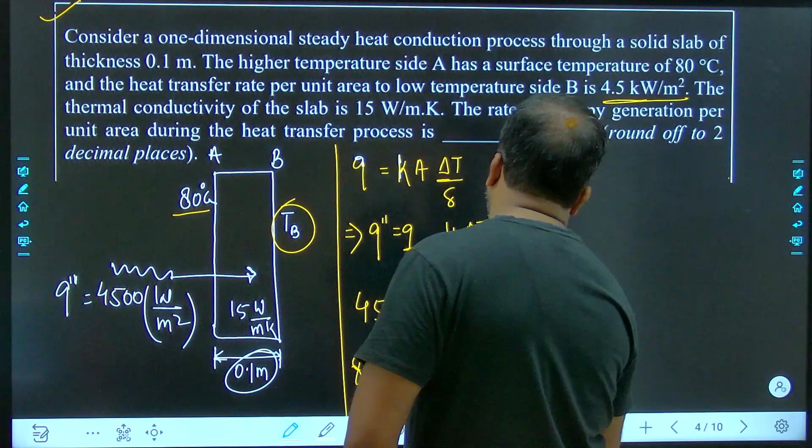So 4500 equals delta T, 80 minus TB, upon del, which is 0.1, and this K will come down, 15. So I can write 80 minus TB is 4500 into 0.1 by 15. So it will be cancelled and it will come out to be as 300, and 300 into 0.1 is 30, means 80 minus TB is 30, which means TB is 50 degrees Celsius. I hope it is clear.

Now, S dot generation is nothing but delta S dot of the wall. And how much is this? Q by TA. It is leaving TA. If you talk only about the slab, it is leaving this surface A, right? It is reaching the surface B. So plus Q by TB. So S dot generation shall be, Q can be taken out as common, 4500, minus 1 upon 353 plus 1 upon 323. So something will come. How much is that?

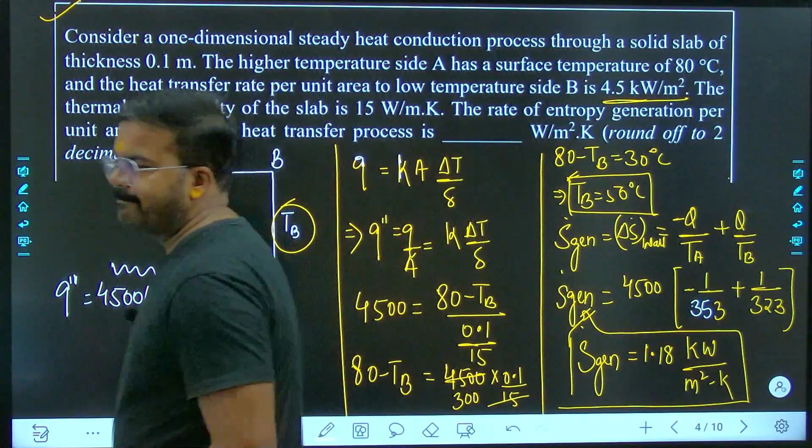Let us see. 1.18 kilowatt per meter squared Kelvin. Sir, kilowatt per meter square is not the unit, then why is it coming in kilowatt per meter square? See, bacha, this is coming in kilowatt per meter square because the heat involved here is not heat transfer rate actually. It is heat flux. That is why. I hope it is done. Kindly take a screenshot, then we shall be moving forward. Okay? Fine. Next up.

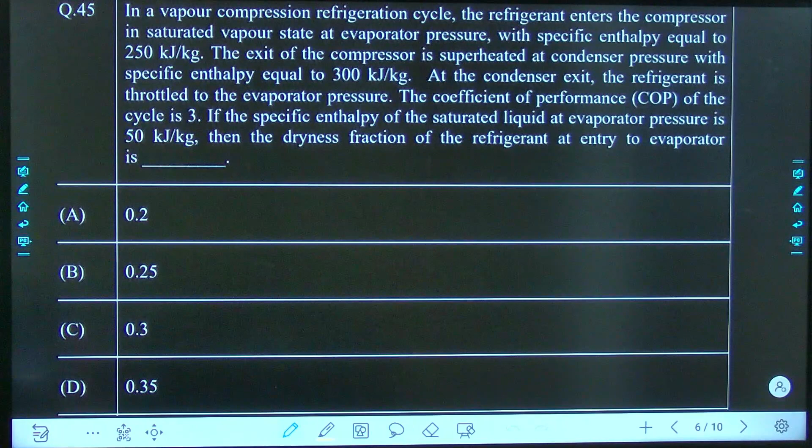Next, this question is a good one. Please try it out, then we shall be moving forward. Okay, so let's move forward. Try this out. Now you have this. All right.

And the enthalpies are mentioned over here. For example, over here, the enthalpy is given to be as 300 kilojoule per kg. Over here, it is given to be as 250 kilojoule per kg. Nothing is mentioned here. Over here, HF is given 50. Now we know that COP can be written as refrigeration effect upon work input: H1 minus H4 upon H2 minus H1. So COP is 3, 250 minus H4 over 300 minus 250, so 50 into 3 is 150, H4 shall be 100.

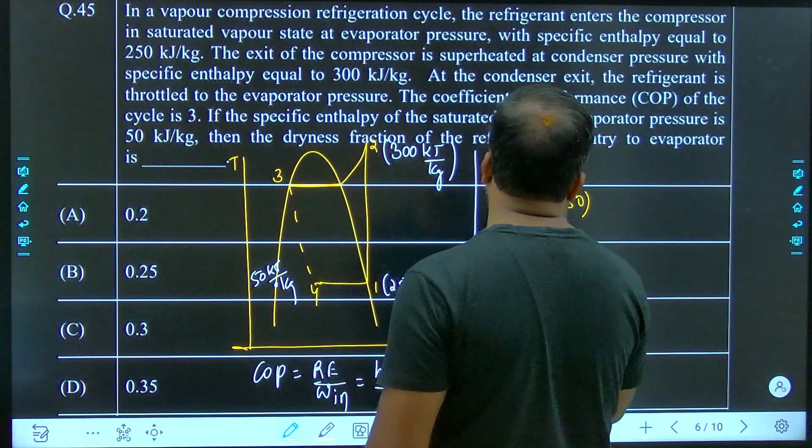Right? Now, this value of H4 can be written as HF plus X times Hg minus HF. Am I right? H4 is HF 50 plus X times 250 minus 50.

Am I right? Now what we are getting? X equals to 100 minus 50 upon this shall be 250 minus 50. That is your X. Now the value of X coming out to be as 1 by 4. So this 1 by 4 shall be 0.25.

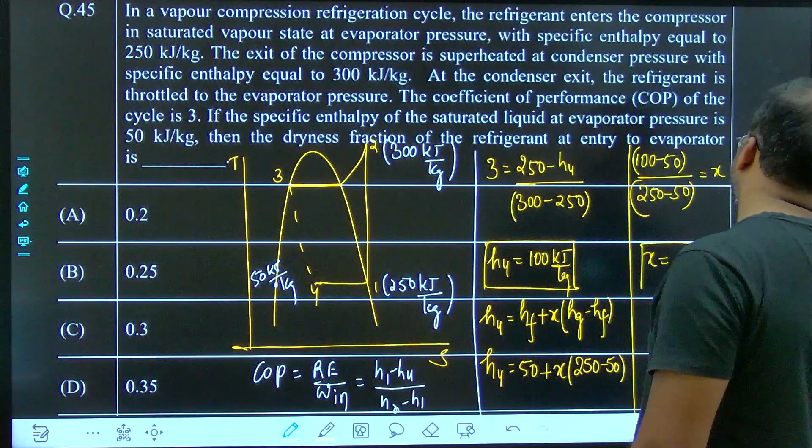X shall be 0.25. That is the answer. I hope you have understood this, right? X value is coming out to be as 0.25. The value of X is 0.25, of course. Am I clear? So kindly just copy down or take a screenshot simply. No need to copy down this lengthy part. Take a screenshot, then we shall move forward.

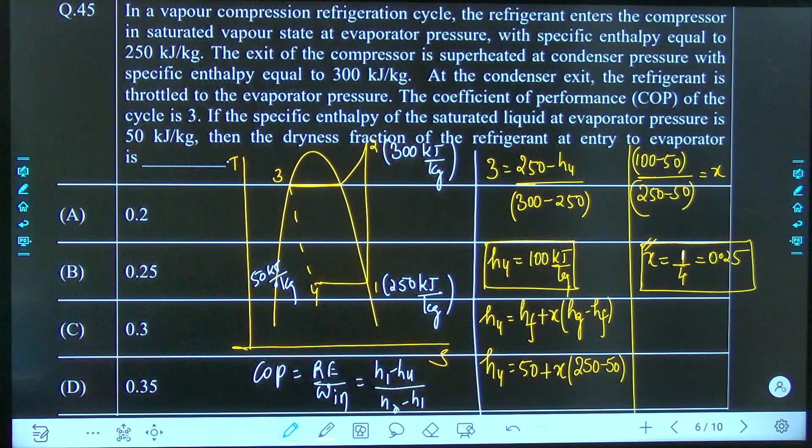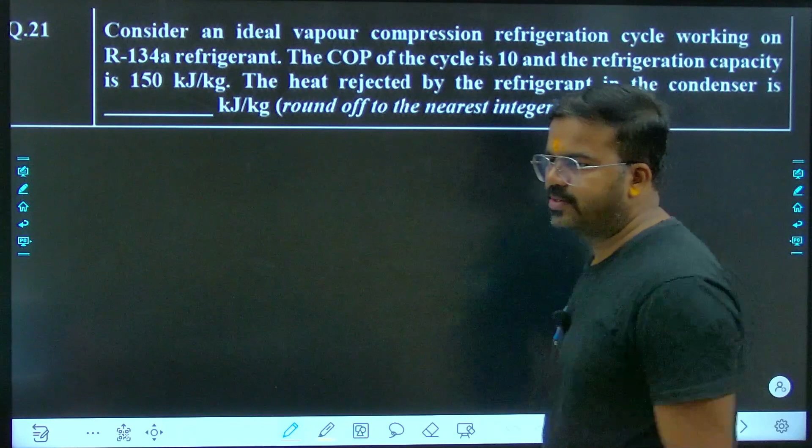Okay, I think ample amount of time was given. Next, this question is damn easy. Try it out. It's a very good question. Try it out, please.

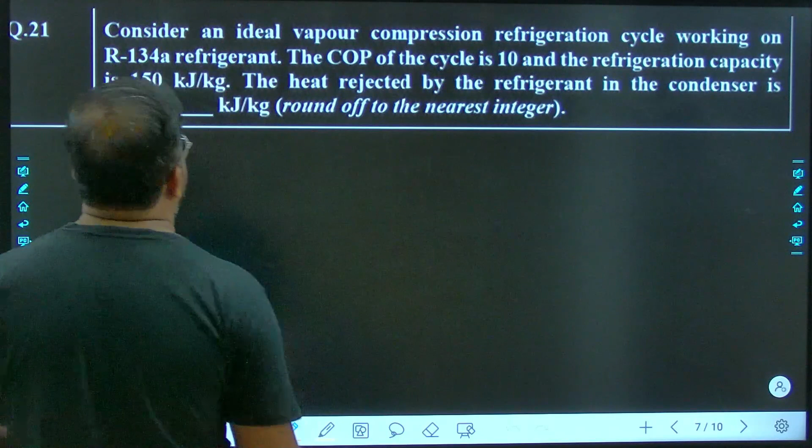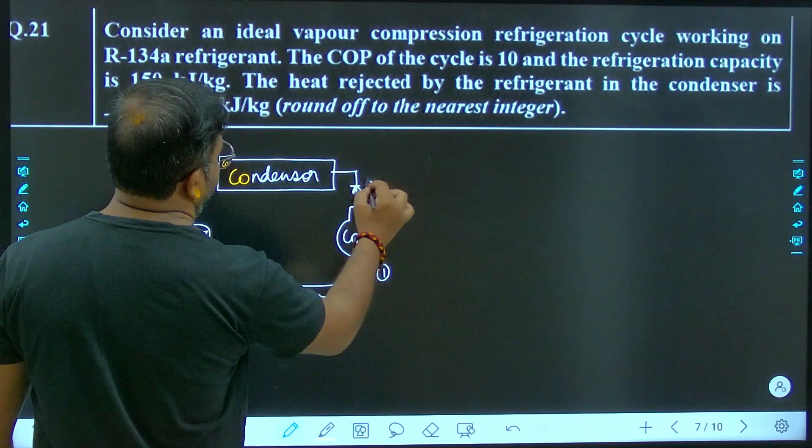Let's see the next part. This is the condenser, right? That is your compression. This is the evaporator. This one is throttle valve. Okay, 1, 2, 3, 4.

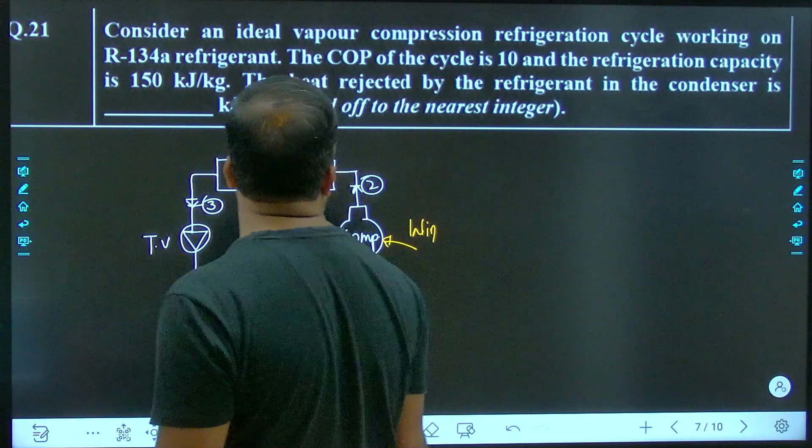So this is taking up heat which is equal to 150 kilojoule per kg. This one is some work input going in, and this is the condenser, right? So some heat will be lost from the condenser. So now if you apply the energy balance, it will be energy coming in equals total energy out.

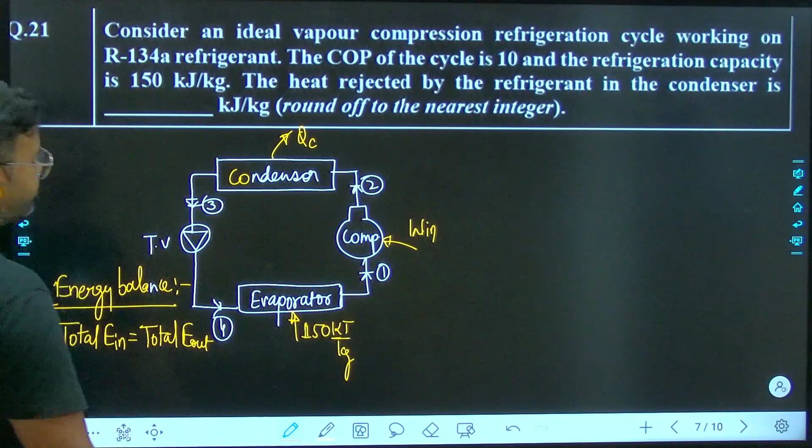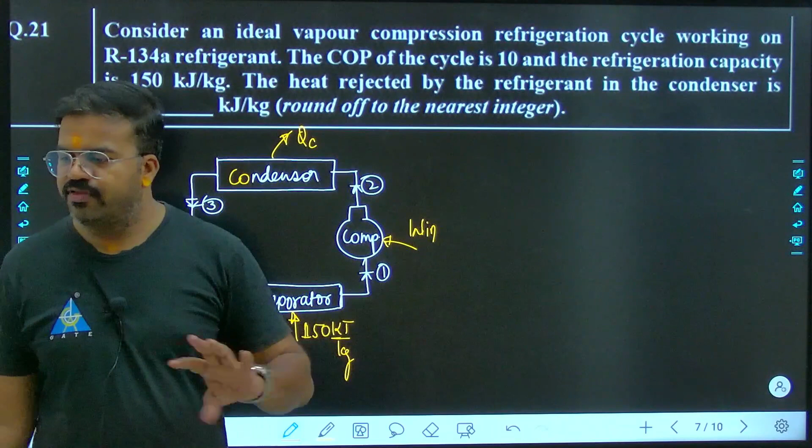So now how much energy in is coming? 150 plus W in will be equal to QC. So if somehow we are able to find out this W in, all will be done. So how to find it out? Let's see, through the help of COP we can do that. What is COP? COP is refrigeration effect upon work input.

So COP is 10, not 3, my mistake, 10. 150 over W in. W in shall be 150 over 10, 15 kilojoule per kilogram. Am I right? So now QC shall be 150 plus 15, that is 165 kilojoule per kilogram. That is our QC.

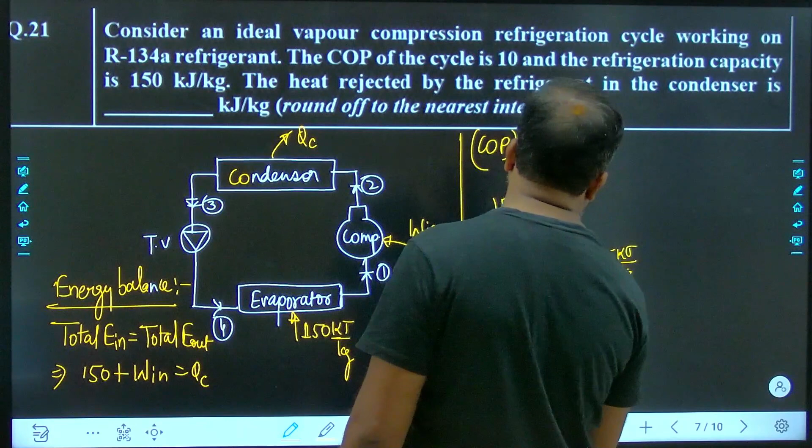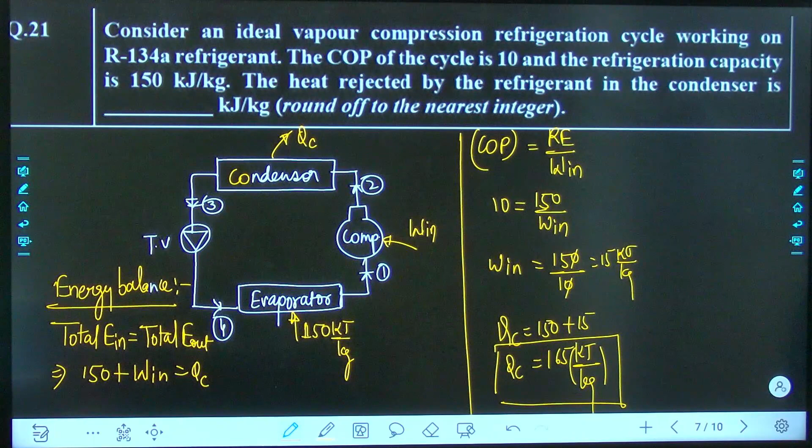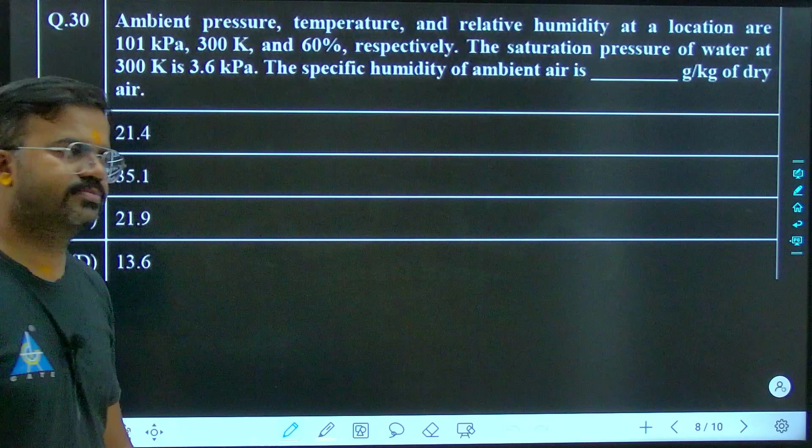Simple, kindly take a screenshot, then we shall move forward. Take a screenshot please. Okay, next question, try this question out. It is from psychrometry, right? That is ambient air and all. Try this out, then we shall move forward.

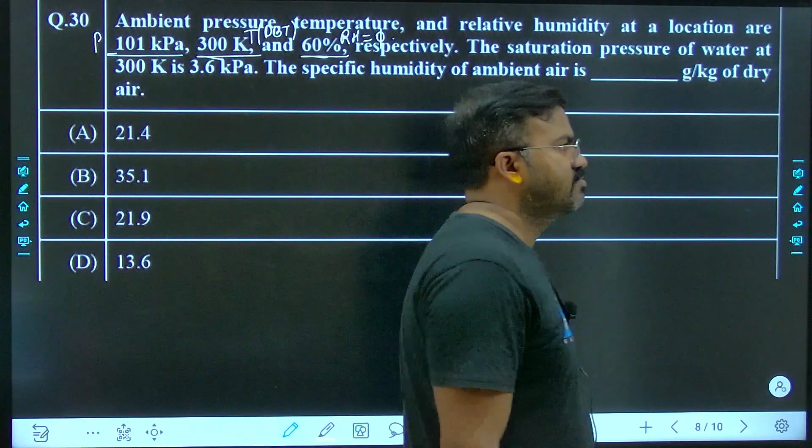So what is this phi? Let me give you a context as to what is the meaning of phi, what is the significance of phi. Whenever cricket matches are happening, whenever there is a cricket match going on, they always announce in terms of moisture content or humidity, and that is announced in terms of percentage. So that percentage is 60%.

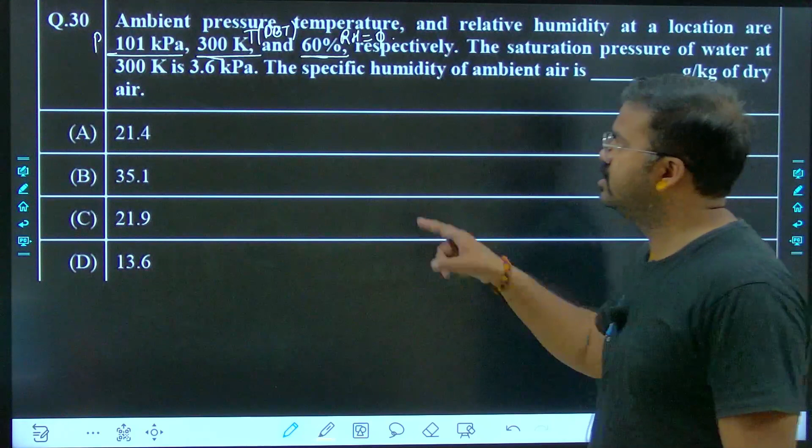So RH is 60%, that is 0.6, PV by PVS. Am I right? It is your PV upon PVS. And PVS is this. It is given now, saturation pressure at this point. So PV equals to 0.6 into PVS, that is 3.6, which means 2.16 kilopascal.

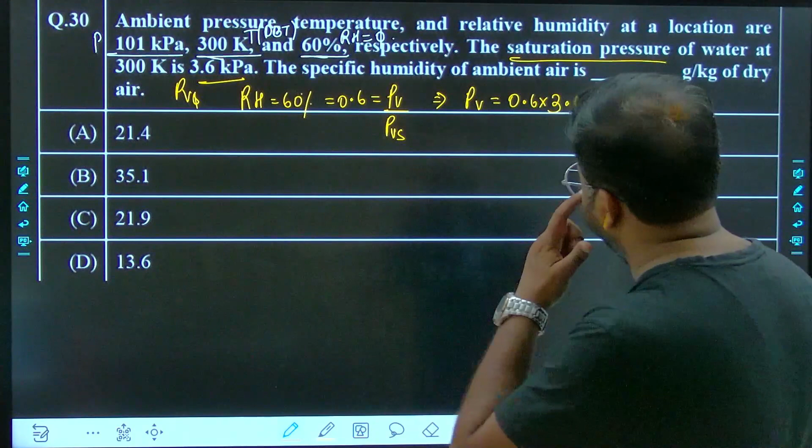This much PV is coming. Now, omega shall be 0.622 PV over P minus PV. Am I right? Now, omega will be 0.622, PV is 2.16 over 101 minus 2.16. So now omega will come. Let's see how much it is coming out to be. We'll have to calculate.

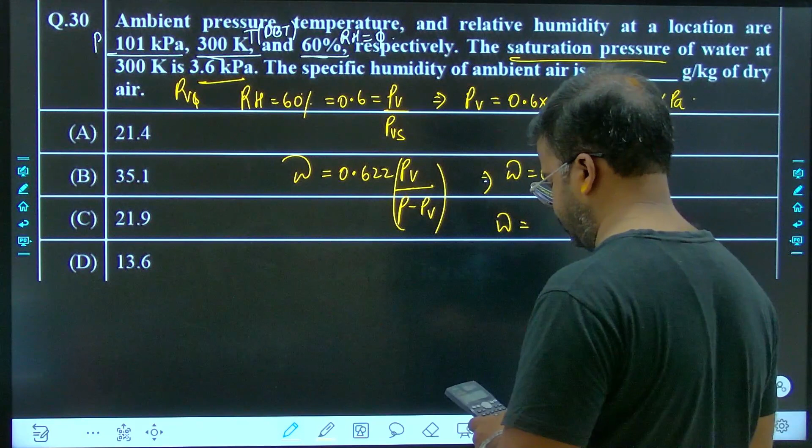0.01359 kilogram per kilogram dry air. But it is asking gram per. So omega shall be 0.01359 into 10 to the power 3 grams per kilogram dry air. So omega shall be 13.6 grams per kilogram dry air. All right.

This is the value of omega. I hope it is clear. I want you guys to please take a screenshot. Then we shall be moving forward. Kindly take a screenshot and then we shall be moving forward. Do it, please.

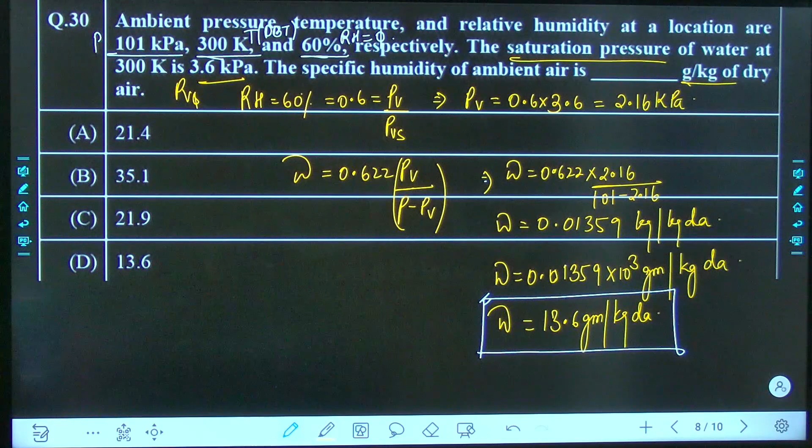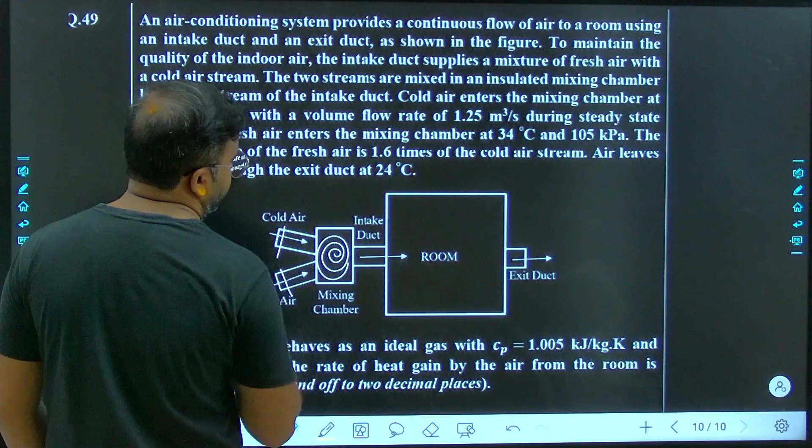Okay, so now please understand with the help of diagram what is happening. Some cold air is coming, some fresh air is coming, they are mixing up here, and after mixing they are being sent to the room, and from the room they are exiting out at 24 degrees Celsius.

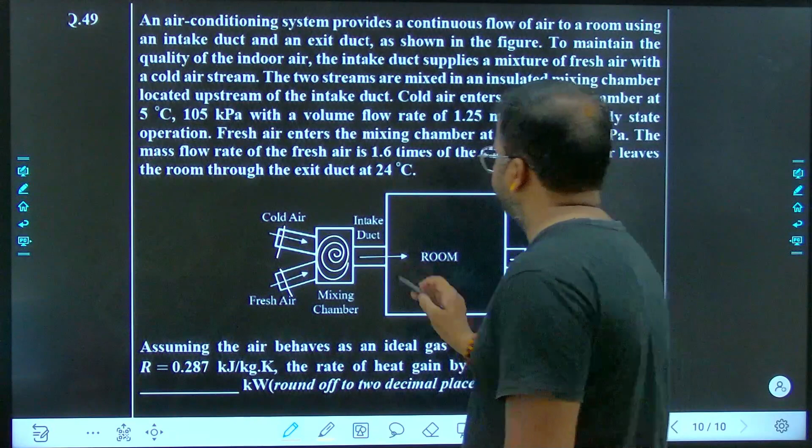We don't know the temperature over here, so let us keep it as T. 105 kilopascal pressure cold air is coming at 5 degrees Celsius temperature and volume flow rate of 1.25.

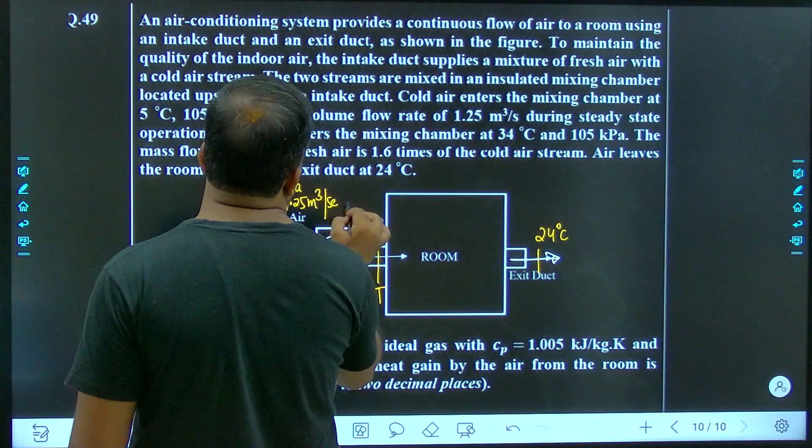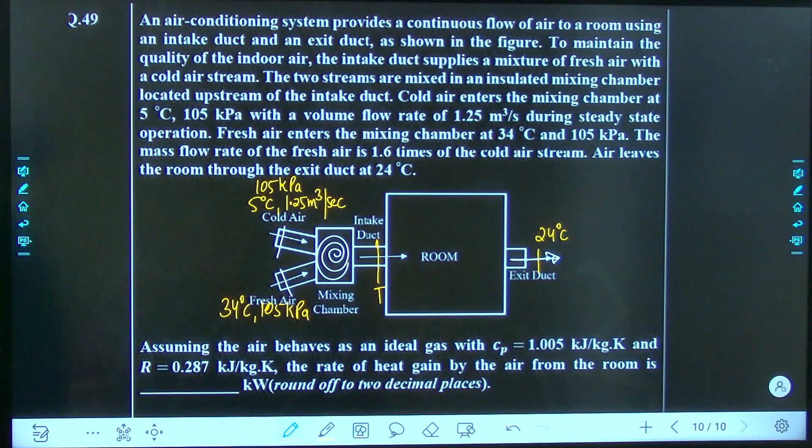Over here, fresh air is coming at 34 degrees Celsius, at a pressure of 105 only. Why? Because if same pressure is maintained, then only mixing without loss can occur. If you want to take out mixing without losses, this has to be done.

Next, this is 1.6 times the mass flow rate of earlier, meter cube per second. Am I right?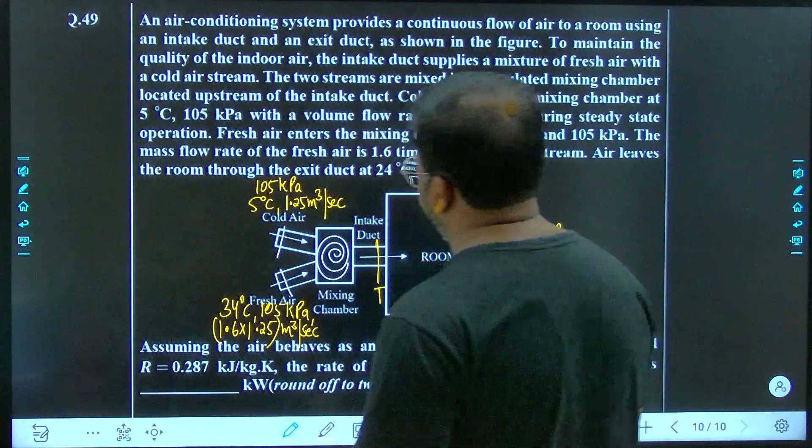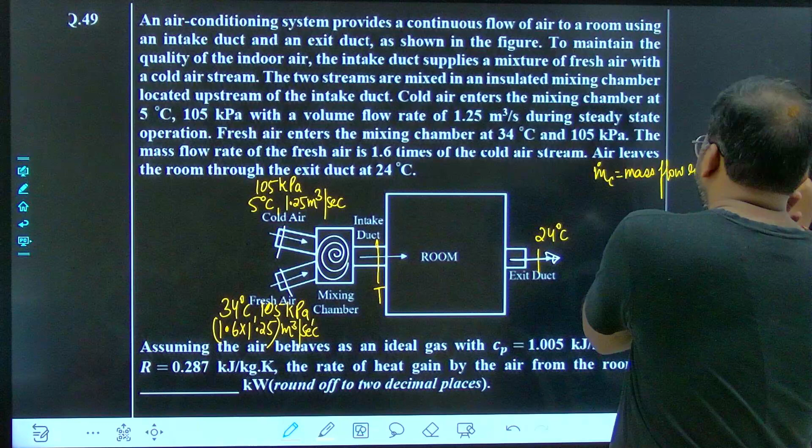Okay, now mass flow rate, m dot c, mass flow rate in of cold air. If we talk about mass flow rate of cold air, P V dot upon RT. How much is P? 101 kilopascal.

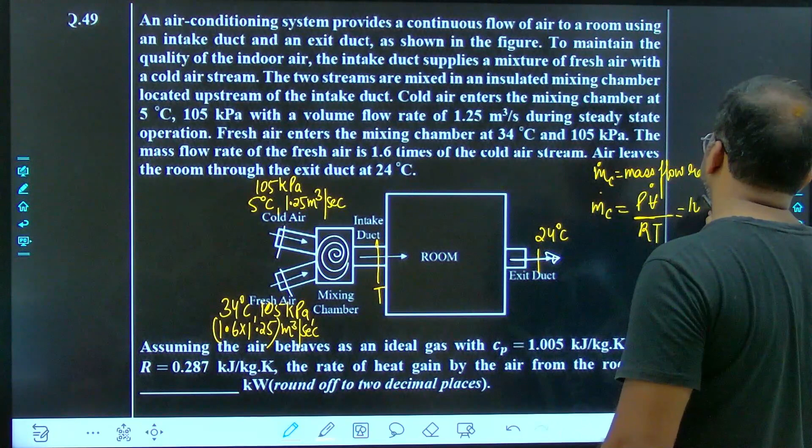V dot is 1.25 upon R. How much is R? 0.287. Temperature is 5, means 278. Am I right? That is the mass flow rate of cold air.

Now see, 1.58236 kg per second.

And mass flow rate of this fresh air will be 1.6 times m dot c. Why? Because it is 1.6 times that of cold air stream in volume flow rate. So actually some temperature term will come, so we'll simply calculate in terms of this: volume flow rate, 1.6 into 1.25 upon 0.287 times 307.

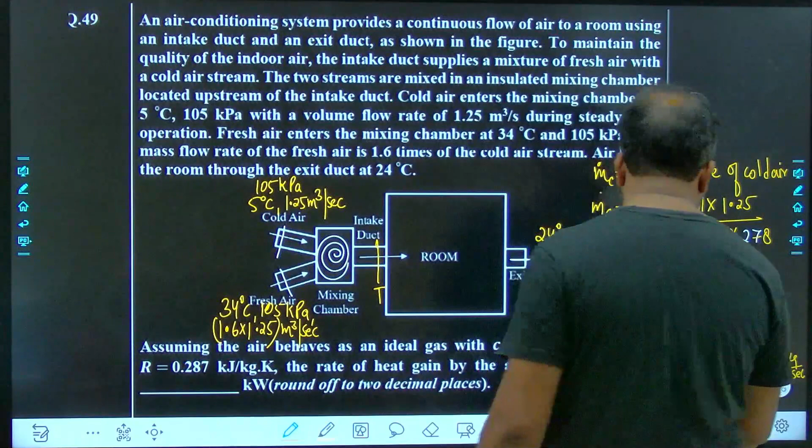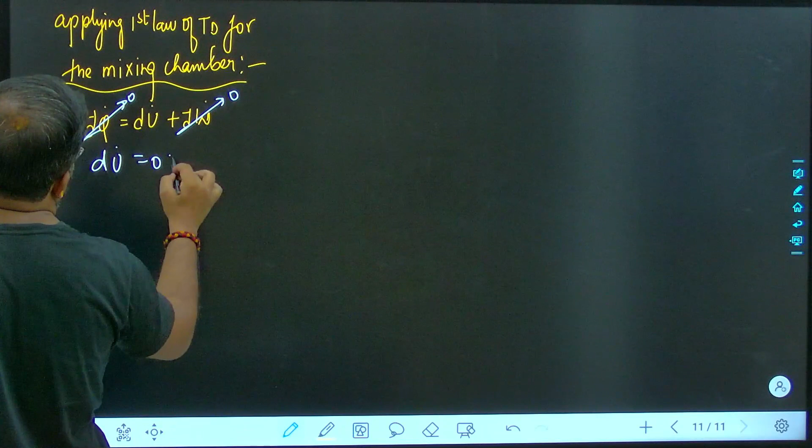Okay now, applying first law of thermodynamics for the mixing chamber. If we apply first law of thermodynamics for the mixing chamber, what are we going to get? Del Q equals du plus del W, this shall be 0, this shall be 0, and du will be 0. Means u final equals u initial. What will be u initial?

m dot cold Cv, air it is, so Cv same, temperature of the cold air, plus m dot fresh air into Cv, temperature of the fresh air, equals to m dot cold plus m dot fresh into Cv, temperature T. Cv will be cancelled out here, yes or no? That shall be cancelled out.

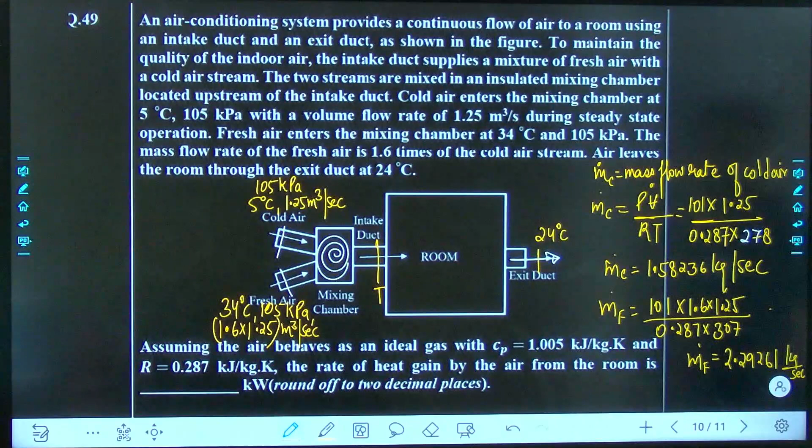So m dot C will be 1.58236, how much was TC? 278, right? Then plus 2.29261 into 307. So this T will come out, let's see how much it is coming out.

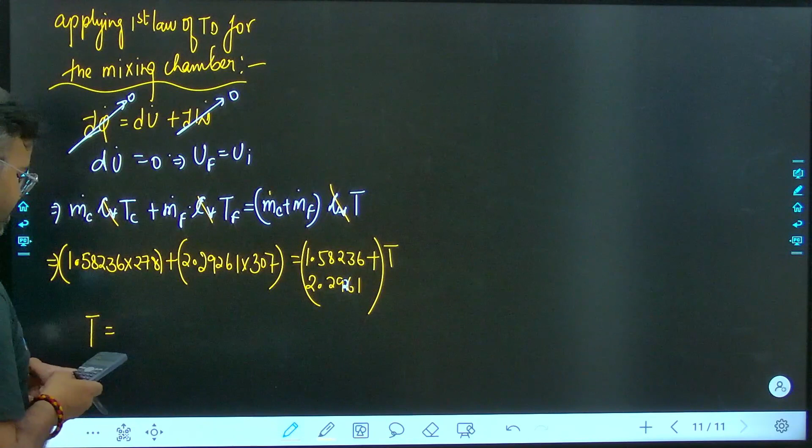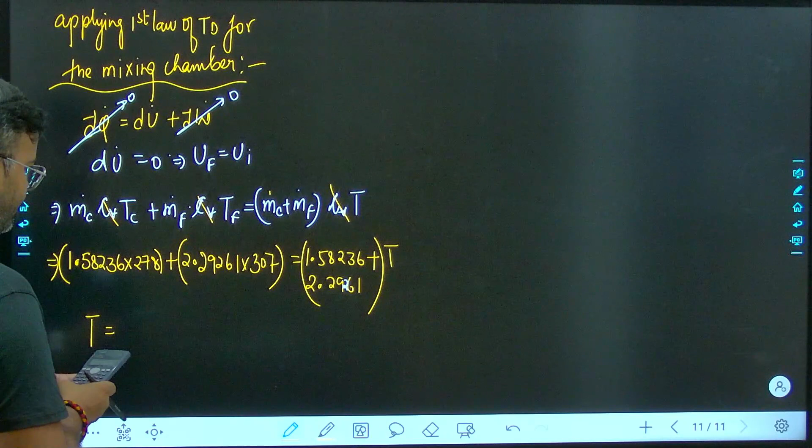Okay, 295.16, which means 22.16 degrees Celsius.

All right, now for the room, air is taking away heat at constant pressure. So the air is taking away heat at constant pressure condition. Now what will happen? If that is the scenario, heat lost is equal to, in the room, m dot Cp.

m dot will be total, means 1.58236 plus 2.29261, 1.005, T out 24 minus 22.16. This is what we are obtaining. Say yes or no, am I right? Let us find out.

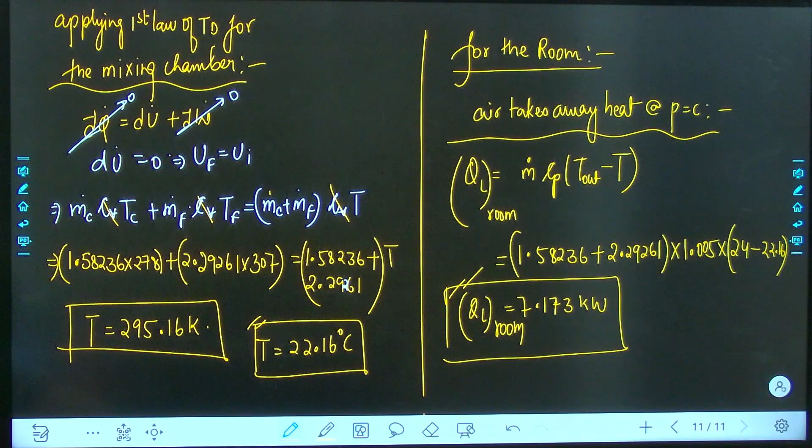Okay, so 7.173 kilowatt is the answer coming out. So I hope it is done, I really hope it is understood.